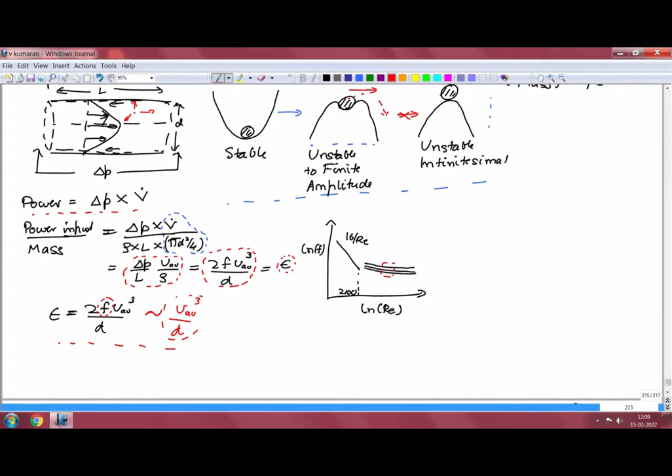The large scale motion has velocity and length scale comparable to the average velocity and the pipe diameter. The total rate of dissipation of energy per unit mass is an intensive quantity, and that can be estimated as the average velocity cubed divided by d, because that has to be equal to the power that is put in at the large scale.

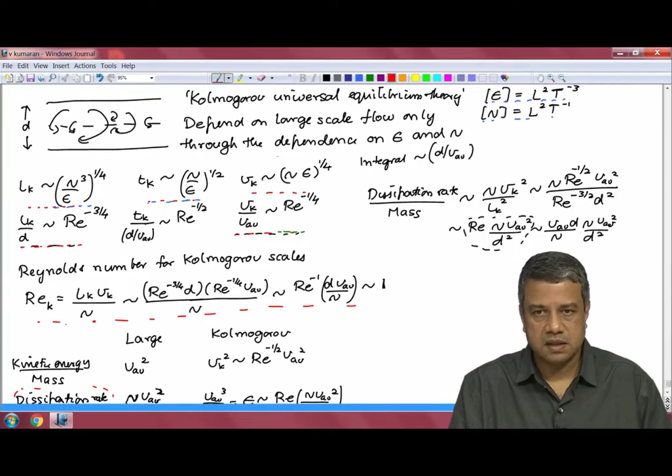The smallest scales in the flow, called the Kolmogorov scale, are estimated from the following assumption: the size and velocity of the small scale eddies are so much smaller than the size and velocity of the large scales that they do not depend directly on the large scale velocity and pipe diameter, but rather depend only upon the rate of input of energy per unit mass, or the rate of dissipation of energy per unit mass, because it is at this small scale that all the energy is dissipated.

On that basis, we estimated the size, the time scale and the velocity scale for the smallest scale eddies, just from dimensional analysis and the assumption that these depend only upon the energy dissipation rate per unit mass and the kinematic viscosity. Kinematic viscosity is important because the energy is dissipated due to viscous effects at these small scales.

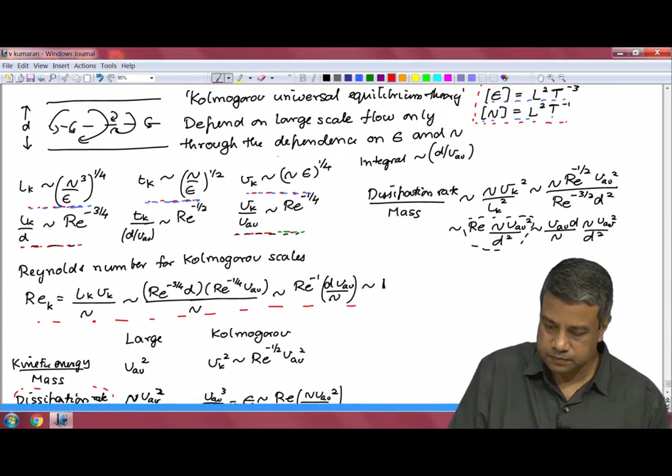And on that basis we had derived expressions for the Kolmogorov scale. The Reynolds number based upon the Kolmogorov scale is 1. Even when the Reynolds number based upon the flow velocity and the pipe diameter is very large, the flow itself creates smaller and smaller scales.

Such that at the smallest scale, the Reynolds number based upon the Kolmogorov scale, the velocity and the kinematic viscosity, is always 1. If you increase the Reynolds number, the smaller scale size will become smaller still, but that Reynolds number will remain order 1.

The kinetic energy is primarily in the large scale flow, whereas the dissipation rate of energy is primarily due to the smallest scales, because the small scales are created within the flow so that they can dissipate all of the energy that is put in at the large scale.

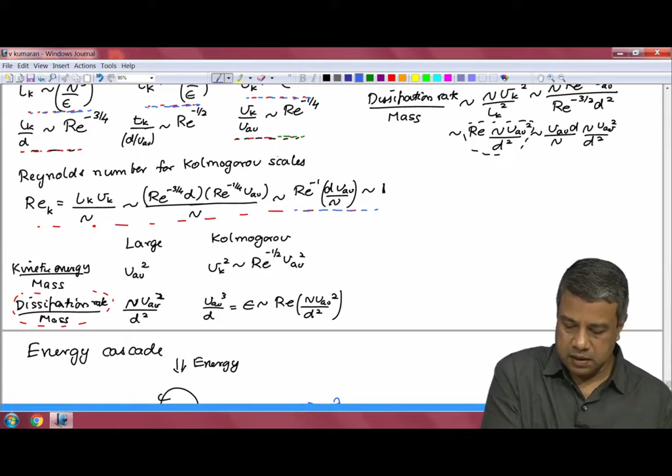And the physical picture is that energy that is being put in due to the pressure difference across the ends of the pipe, that gets transferred from the large scale eddies down to smaller and smaller scales until it is finally dissipated at this smallest scale eddy that is comparable to the Kolmogorov scale.

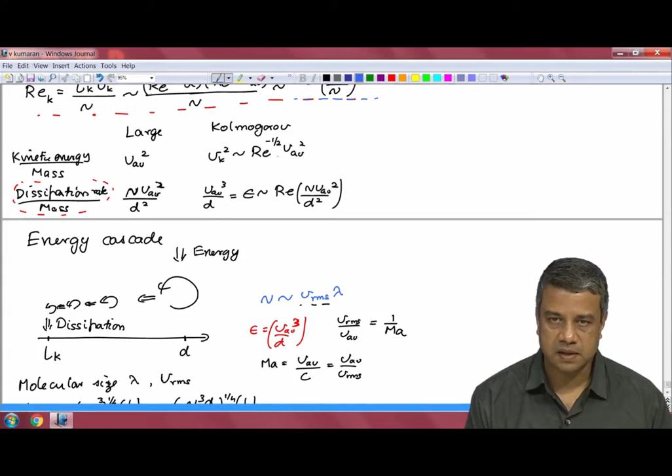And because the smallest scales are much smaller than the large scale, however, the Reynolds number based upon the small scales is order 1. That means that the energy that is put in at the large scale passes through almost unchanged through this cascade of eddies, until at this smallest scale the rate of dissipation of energy becomes comparable to the energy being put in per unit time, and all of that energy gets dissipated at this small scale. So that is the physical picture.

And I had also told you that the smallest scale eddies are always much larger than the molecular sizes, the molecular mean free path and molecular velocity for a gas, or the molecular dimension for a liquid, in the limit of low Mach number for an incompressible flow. The smallest turbulence scales are always much larger than the molecular scales.

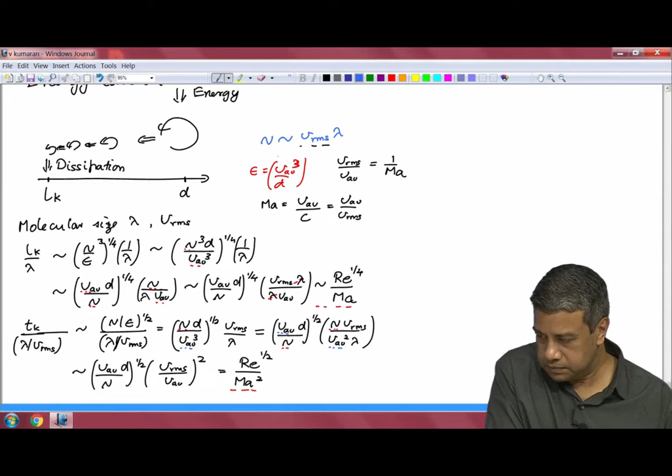So the picture that I have sketched out for you here is in the bulk of a turbulent flow. Recall that I told you that the velocity profile for a turbulent flow is flatter at the center and has steeper gradients at the wall in comparison to a laminar flow, where this is the average velocity, and this is the pipe diameter.

So in this region where the velocity is nearly constant, what I will call the bulk of the flow, in that region you have transport of energy due to turbulent eddies.

The fluctuations in the large scale flow are in general not isotropic. Typically, the intensity of the velocity fluctuations in the streamwise direction for the large scale flow will be much larger than those in the cross stream direction.

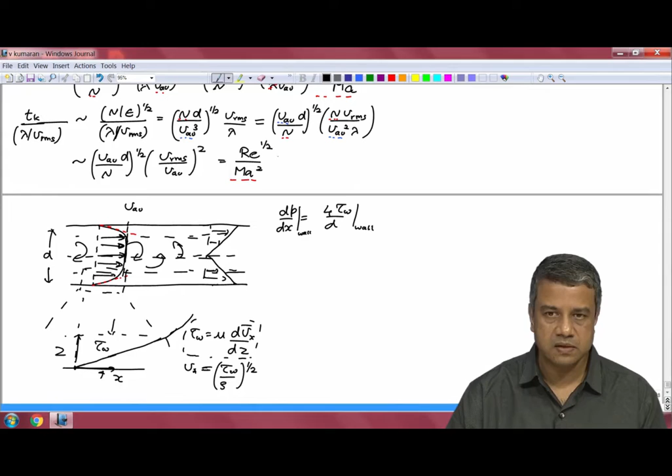As I said, in the bulk of the flow is turbulent, and therefore transport takes place due to turbulent eddies. However, as you come closer to the wall, the velocity fluctuations have to decrease to 0 at the wall, and if the velocity fluctuations decrease to 0, momentum transport is due to molecular diffusion, due to viscosity.

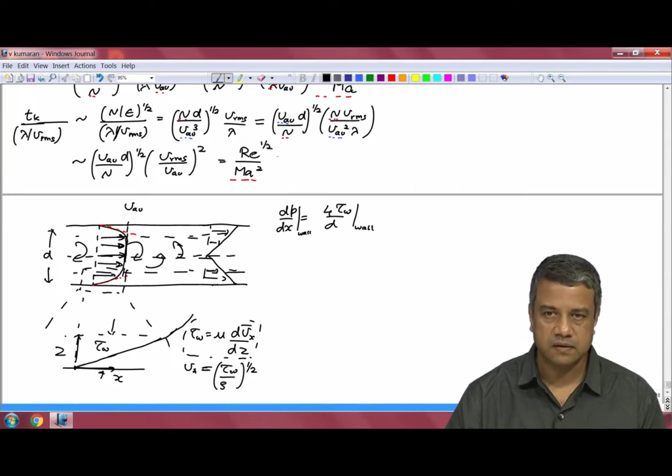So, in this region, the velocity scale is v star, which is equal to the square root of the ratio of the wall shear stress and the density.

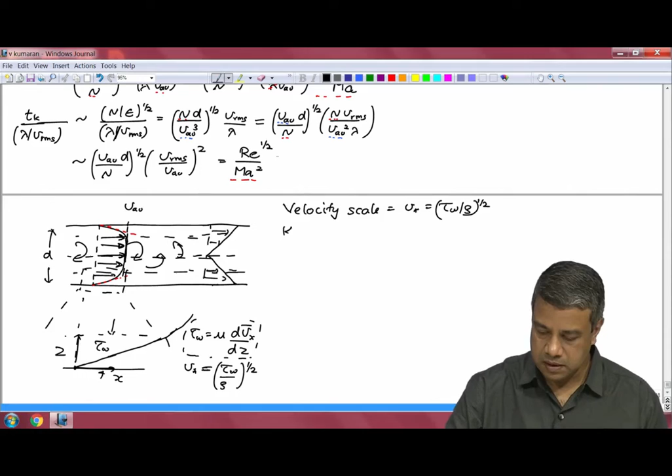And because there is viscous transport here, there is also kinematic viscosity, nu. The kinematic viscosity is relevant in this region because here the transport is due to molecular diffusion. Therefore, kinematic viscosity is of significance here.

If this length scale is much smaller than the pipe diameter, then the pipe diameter is no longer a relevant parameter within this region, since the thickness of this region is much smaller than the pipe diameter.

And what it means is that the thickness of this region can depend only upon this wall shear stress, or the friction velocity, and the kinematic viscosity. And there is only one way that you can get a length scale: it is equal to nu by V star, from the friction velocity and the kinematic viscosity.

So, this distance from the wall I have labeled as Z, I can call it as R minus r, where R is the pipe radius and r is the radius. So, at a particular location the distance from the wall is equal to the total pipe radius minus the radius to that point in the flow.

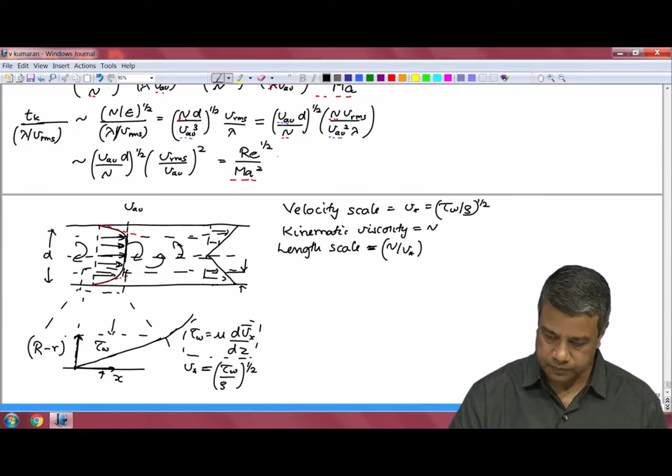So, therefore, I can define a scaled velocity. This region where the wall shear stress is approximately a constant and where transport takes place due to viscous diffusion is called the viscous sublayer.

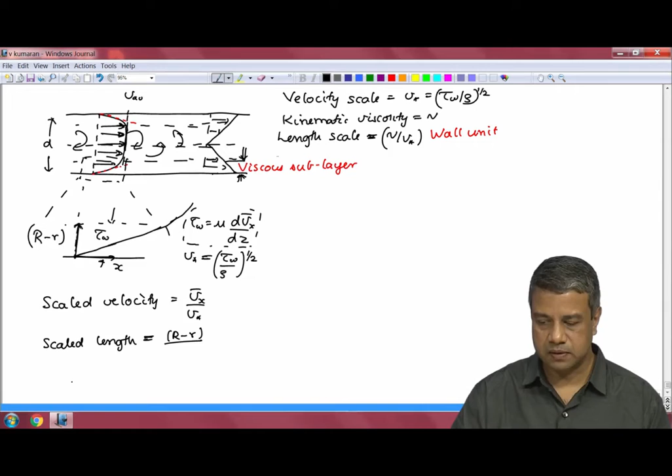And the length scale here is called a wall unit, and the scaled velocity in this case is equal to the average velocity divided by the friction velocity, and the scaled length is equal to the distance from the wall, R minus r, divided by this wall unit, this length scale nu by V star. I will call this as W plus and this as Vx plus.

These are called the inner scalings, the scalings very close to the wall.

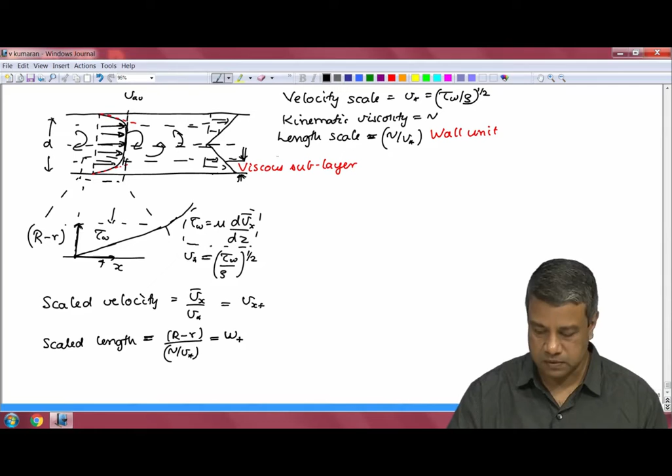In these inner units, what is the velocity profile close to the wall? I know that very close to the wall I should have the wall shear stress is equal to mu times dVx by dr.

And therefore, I know that the wall shear stress can be written from this relationship: the wall shear stress is equal to rho V star square, is equal to mu into dVx by dr. And if I divide throughout by rho V star square, I will get this: 1 is equal to mu by rho into 1 by V star square dVx by dr.

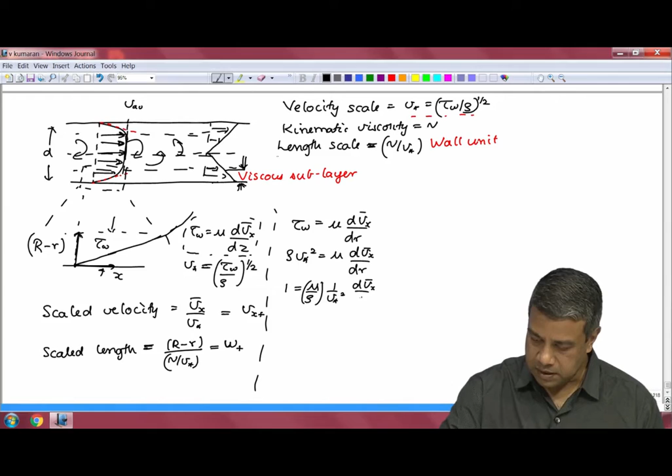Just rewriting mu by rho as the kinematic viscosity. This you can easily verify is going to be equal to dVx plus divided by dW plus.

What that means is that expressed in terms of inner units, velocity scaled by the friction velocity V star and length scaled by the wall unit nu by V star, the velocity gradient at the wall in these scaled units is identically equal to 1. So this slope, when expressed in terms of this divided by nu by V star and the velocity scaled by V star, that will be equal to 1, where W is equal to the distance from the wall divided by a wall unit.

Within this viscous sublayer you would expect, because there is no transport due to turbulent fluctuations, the only velocity scale is this friction velocity, the wall shear stress divided by density to the half power, and the only length scale is nu by V star, where V star is the friction velocity. Therefore, if I scale the mean velocity and the distance from the wall in this manner, I will get a linear profile close to the wall.

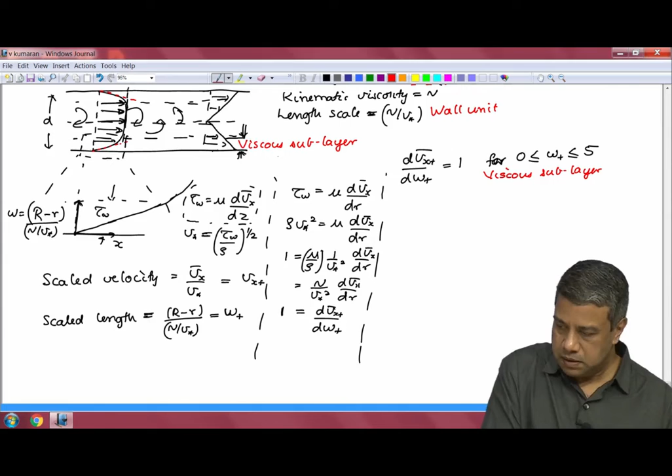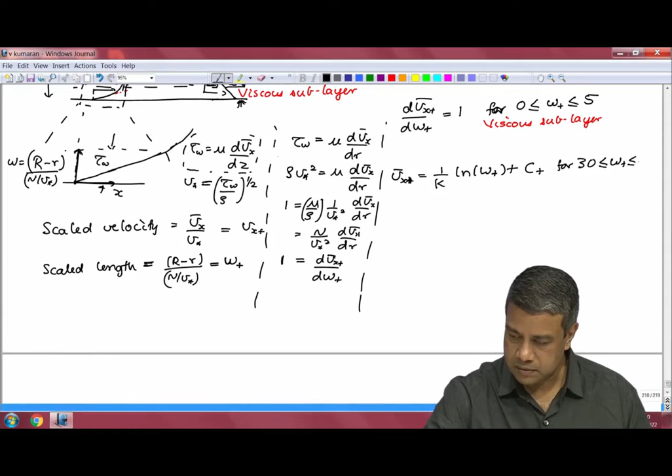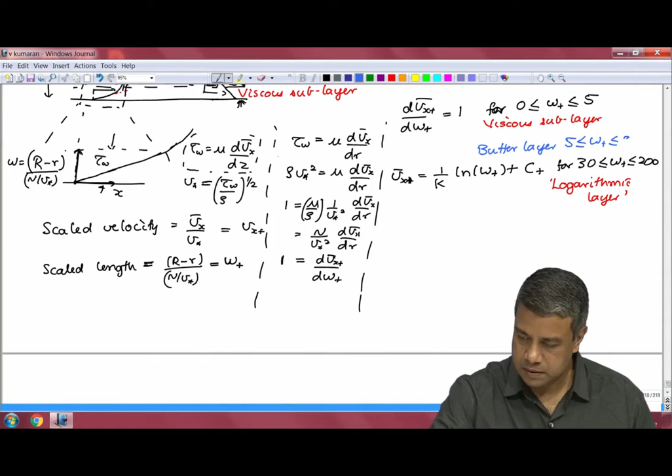In between the viscous sublayer and the logarithmic layer, there is a buffer layer, for 5 less than or equal to W plus.

So if I plot the mean velocity very close to the wall, on a log linear plot, log of W plus versus Vx plus: in the viscous sublayer, the velocity is a linear function, it increases linearly with distance from the wall. So in this log linear plot, you will get something that goes like this. And then in the logarithmic layer, this will be a straight line, because Vx plus is equal to 1 by k times log of W plus.

The first observation, that dVx plus by dW plus is equal to 1 in the viscous sublayer, that is an exact solution. I just derived it for you over here. This is an exact solution very close to the wall, based on the assumption that the amplitude of the velocity fluctuations decreases to 0 at the wall. Based upon that assumption, you can show that the slope of the velocity profile when expressed in inner units is equal to 1.

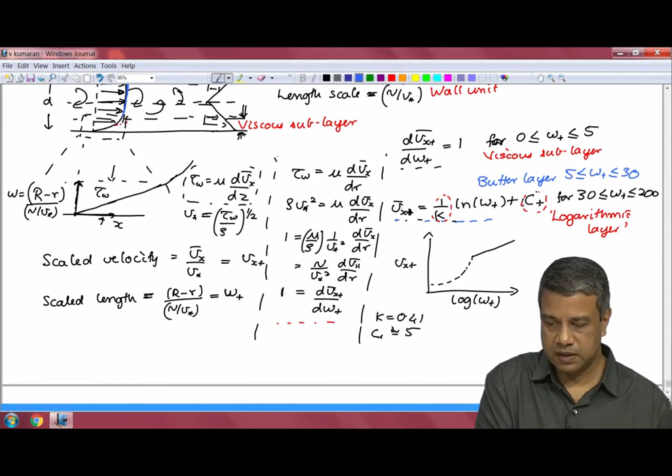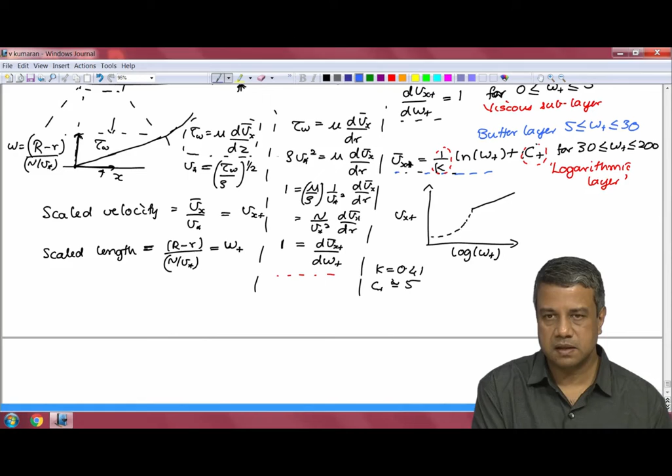The viscous sublayer, the buffer layer, and the logarithmic layer. The viscous sublayer is an exact solution: if you scale the velocity by the friction velocity and the distance by the wall unit, it just follows from simple definitions. The logarithmic layer is an observation that can be justified by asymptotic analysis. Then there is a buffer layer in between, and we can estimate what these length scales are.

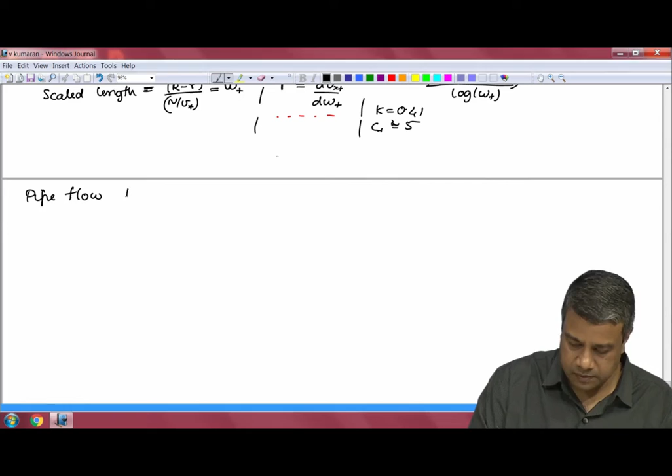For example, consider a pipe flow for which the Reynolds number is equal to 10 power 5, and the friction factor is equal to 4.5 into 10 power minus 3. That is the friction factor.

Note that this friction factor is much higher than for a laminar flow. If the flow were laminar, it would be 16 by Re, which is 1.6 into 10 power minus 4, whereas since the flow is turbulent, the friction factor is much higher.

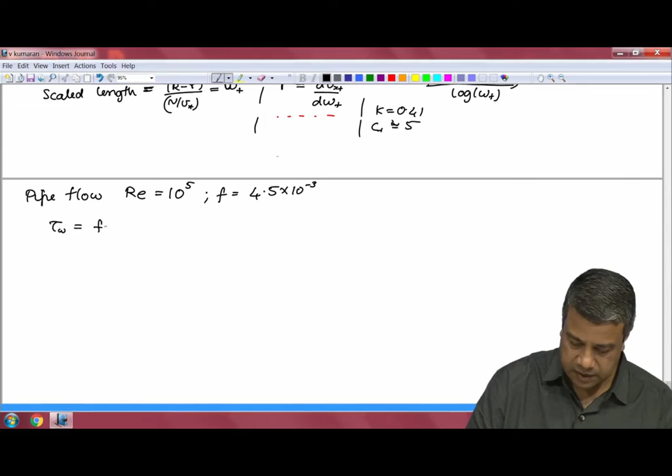The wall shear stress is equal to the friction factor times the kinetic energy per unit volume. That is the definition of the friction factor: friction factor is wall shear stress by kinetic energy per unit volume.

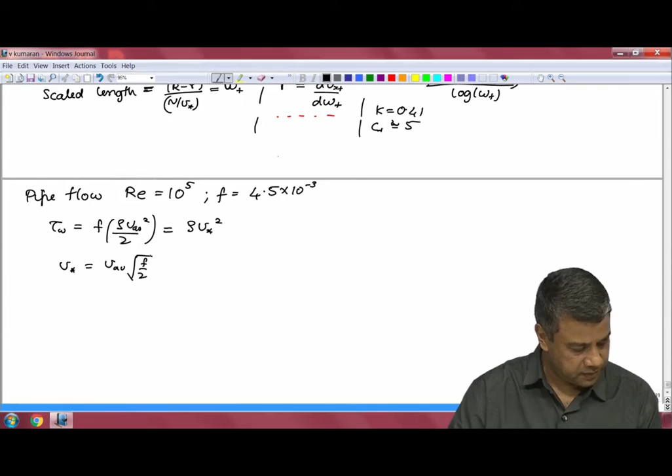However, from our definition of the friction velocity, this is also equal to rho times V star square. This gives us the relationship between V star and the average velocity: V star is equal to V average into square root of f by 2. So, the friction velocity is equal to the average velocity times the square root of the friction factor by 2.

What that means is that the Reynolds number based upon the friction velocity, if you calculate it, is going to be equal to the Reynolds number based upon the average velocity into root f by 2. In this particular case, this Reynolds number is about 4743.

Now you can also get the ratio of the wall unit by the diameter. The wall unit was equal to nu by u star from dimensional analysis. Nu had dimensions of length square per time, velocity had dimension of length per time, into 1 by diameter. You can easily see that this is equal to the inverse of the Reynolds number based upon the friction velocity, because mu by rho is just the kinematic viscosity.

So, this is equal to 2.1 into 10 power minus 4. So, for this flow at a Reynolds number of about 10 power 5, the wall unit is 10 power minus 4 smaller than the pipe diameter.

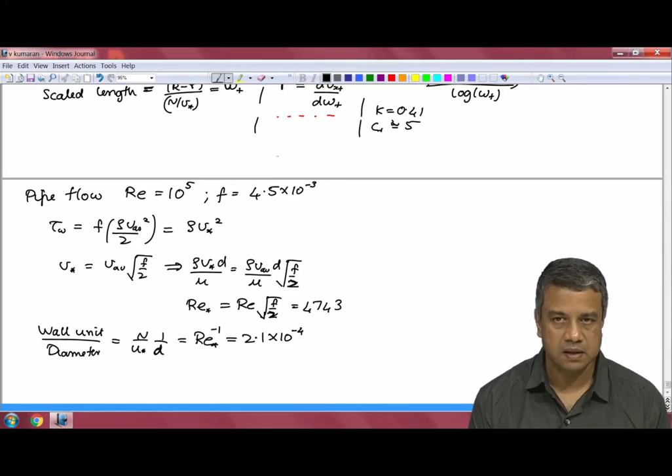In the bulk of the flow you have a turbulent flow, which I described physically in the last lecture. So, the structure of turbulence is: in the bulk of the flow there is transport due to turbulent eddies with sizes ranging from the large scale, the pipe diameter, down to the smallest Kolmogorov scale.

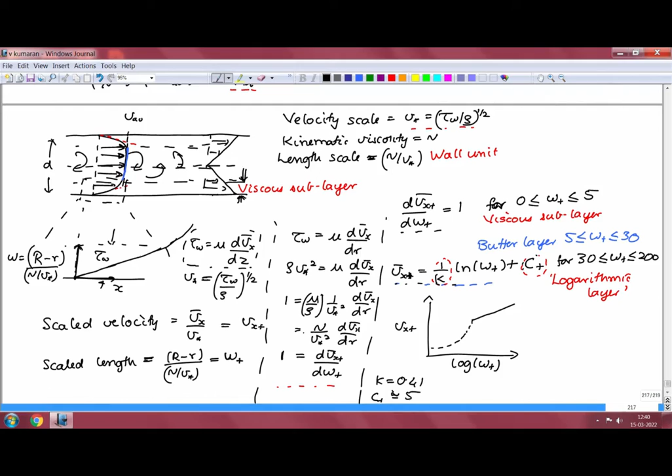When you come close to the wall, the fluctuating velocity has to decrease to zero. There is a viscous sublayer where transport is primarily due to momentum diffusion, and transport due to convection is negligible. In this region, the relevant velocity scale is the friction velocity and the relevant length scale is the wall unit, nu by v star. The velocity gradient expressed in terms of the friction velocity and the wall unit has to be equal to 1 in this viscous sublayer. There is a buffer layer, then a logarithmic law region, and then an outer region where the flow is fully turbulent.

So this is a brief description of turbulence, the energy cascade in turbulence, the Kolmogorov scales in the bulk of the flow, and the turbulent structure very close to the wall. This completes our discussion of turbulence in pipe flow.